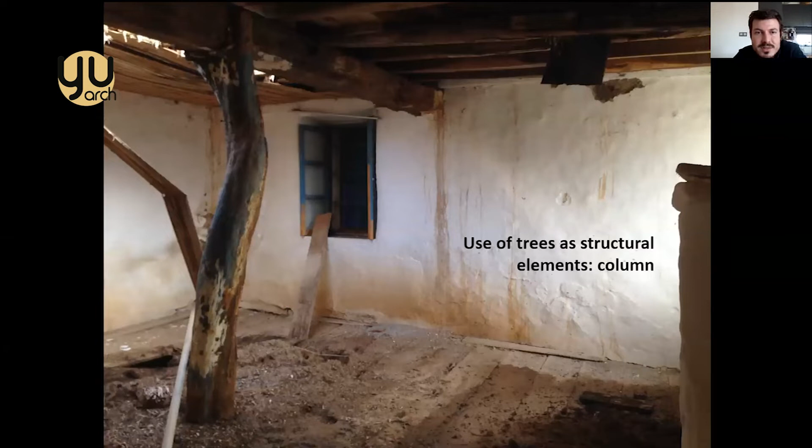Another interesting material, the use of trees as structural elements. They cut the tree and they just put it there as a column. They don't change its shape. It's structurally not very stable, but it's really interesting to use such a natural element directly. For example, in this house, you can see it.

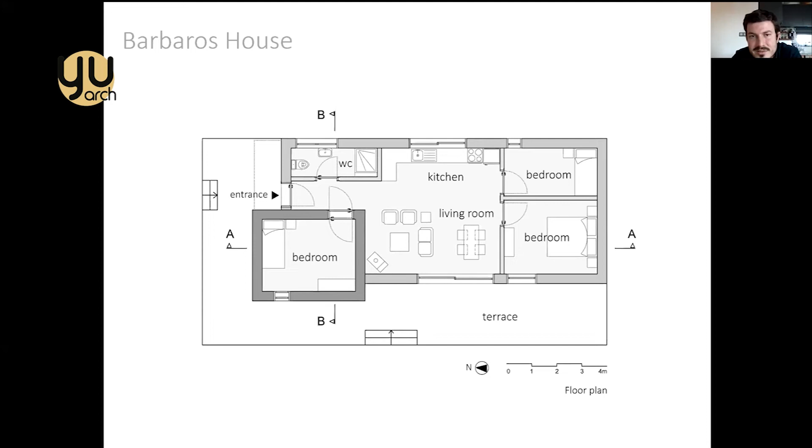So this is where I'm talking now. This is the kitchen and the living room together.

It's a really small house. It's about 80 square meters. And this is the part of the living room.

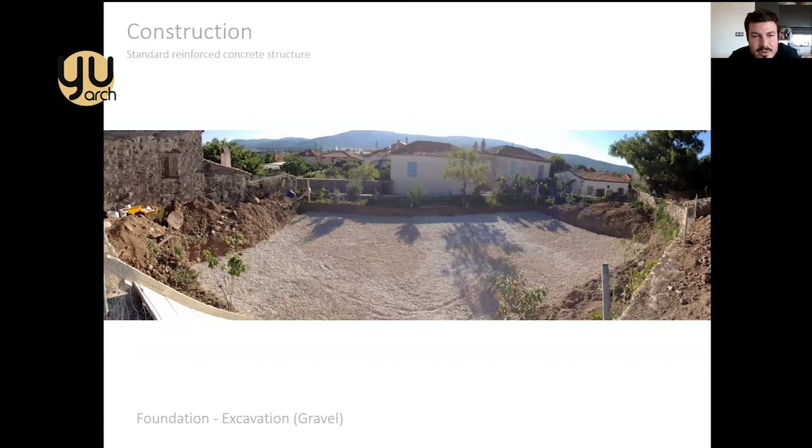And I'm going to show you the construction, starting from the excavation and the reinforced concrete foundations, etc. Just let me skip these slides quickly. This is the photo from the beginning, and then we poured the lean concrete and then made the water insulation.

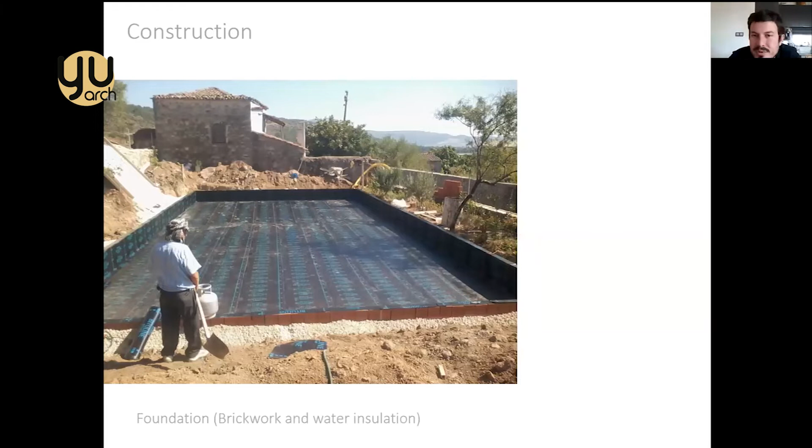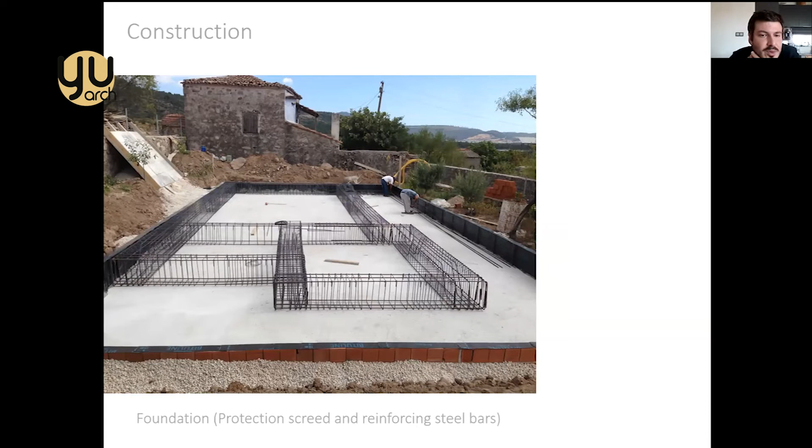And for the foundation, on the top of the water insulation, we poured the protection screed and put the reinforcing steel bars, which is almost the same shape as the whole building, actually. And then the continuous footing formwork was done, and then the concrete foundation walls were finished.

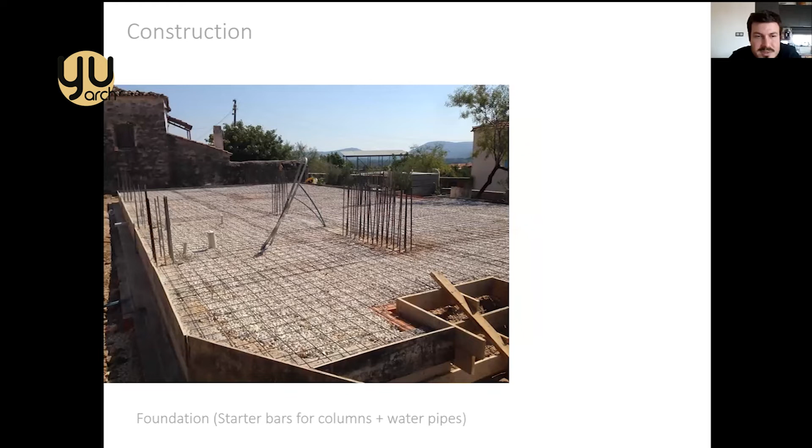After that, you can see the starter bars for columns and the water pipes coming out of the foundation. So this is the plywood formwork for the concrete part of the building, the bedroom part.

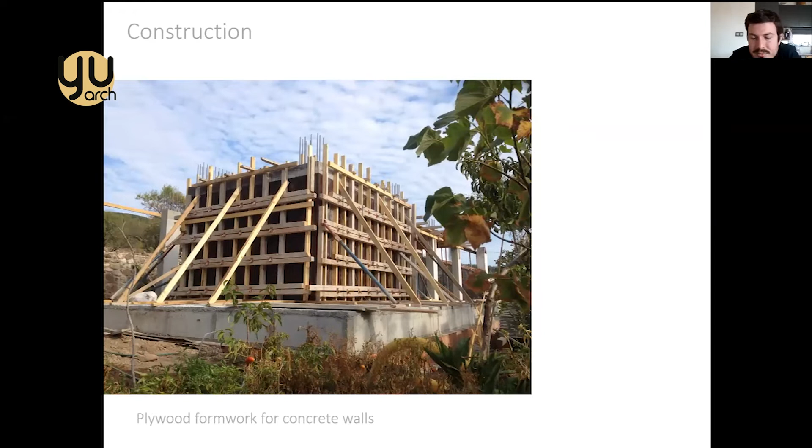And after finishing the concrete formwork, the acoustic and thermal insulation materials were put next to the concrete, and then a second layer of brick walls was completed in order to provide a really good noise control, let's say, to attenuate sound from outside. You have to use heavy walls and a good layering where you have two heavy layers

and a gap plus porous insulating material like rock wool. You can see here we use rock wool. So this is a good solution.

And then I have two windows and two doors next to each other to be protected from the sound transmission, which will be possible through the windows. So I had to use two windows and two doors.

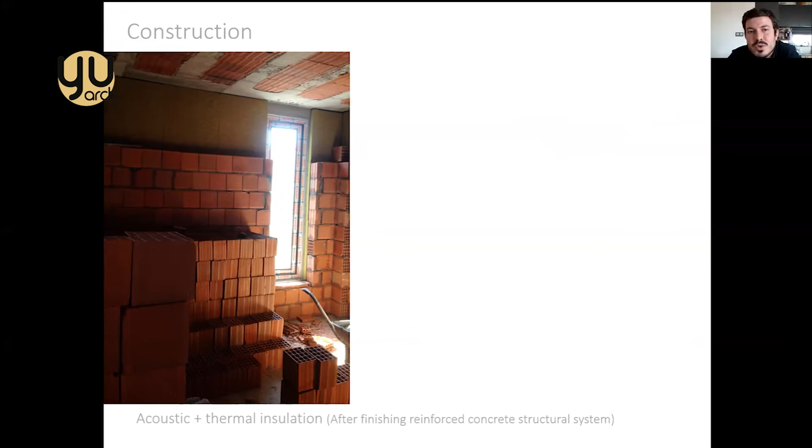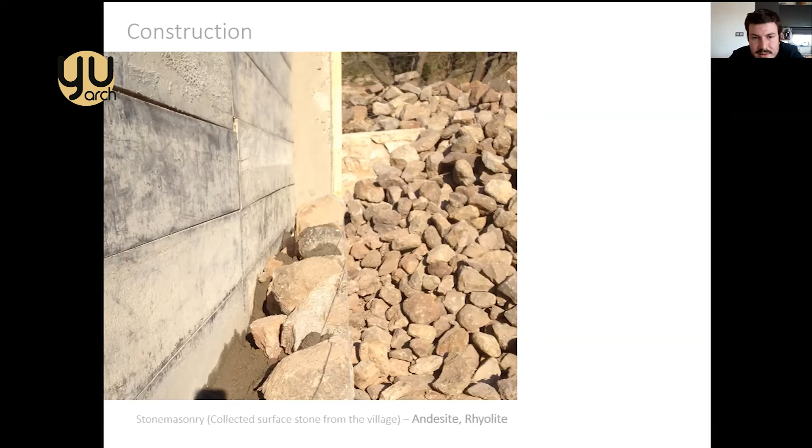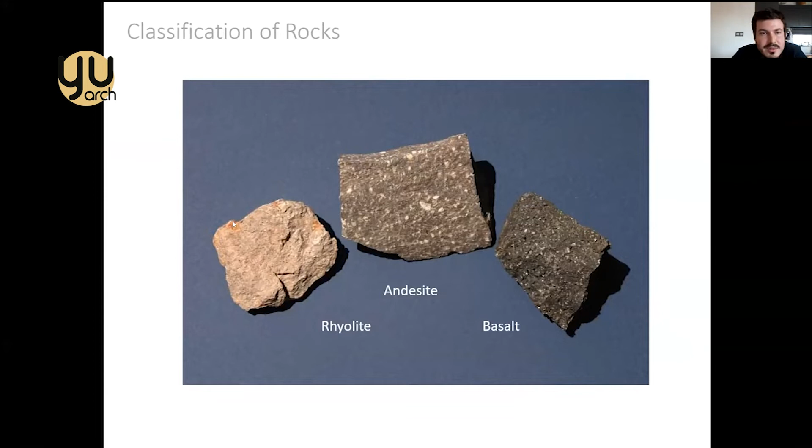So these are the three main stones which are collected from the surroundings with some workers: rhyolite, andesite, and basalt. Basalt is mainly more dark in color, but rhyolite is pinkish, and andesite can be black to brown colored, right? So, as I said, these are extrusive magmatic stones, basalt, andesite, and rhyolite.

But there are lots of different types of rocks which are intrusive magmatic, which means the magma tries to come out to the surface but cannot come right on the surface, and it stays a little bit in the ground. So these kinds of rock formations are called intrusive magmatic, and the ones that can come out from the ground are called extrusive magmatic rocks.

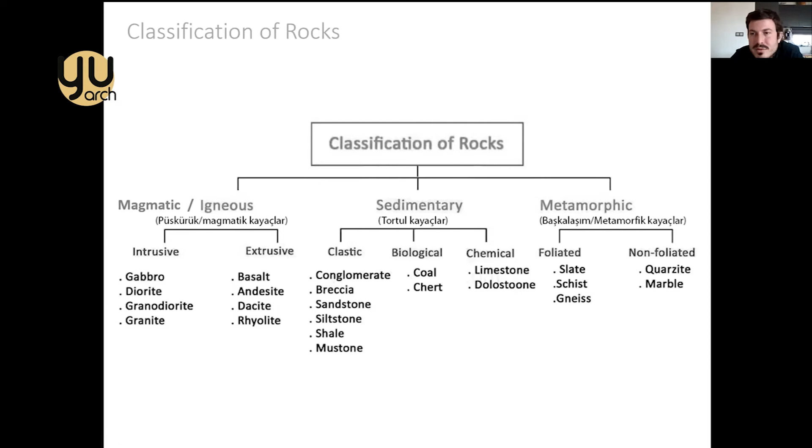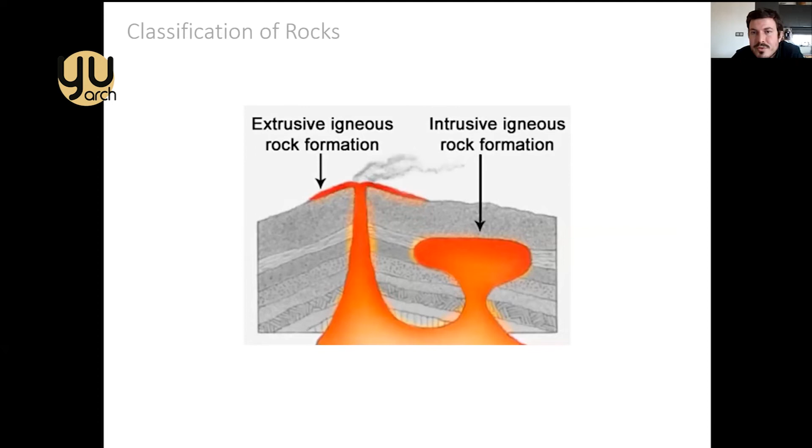And there are also sedimentary rocks and metamorphic rocks, which are used very often in architecture as elements like wall elements or floors or any kind of architectural elements. You can use them in your kitchens, kitchen tops, right? And this is a figure that shows the extrusive and intrusive magmatic rock formations.

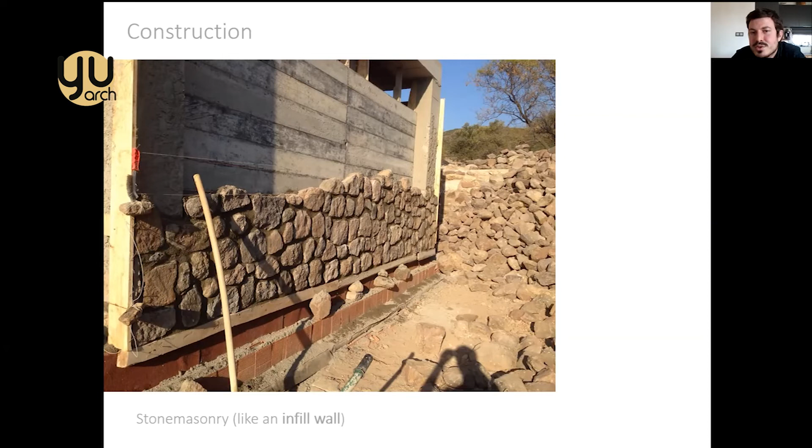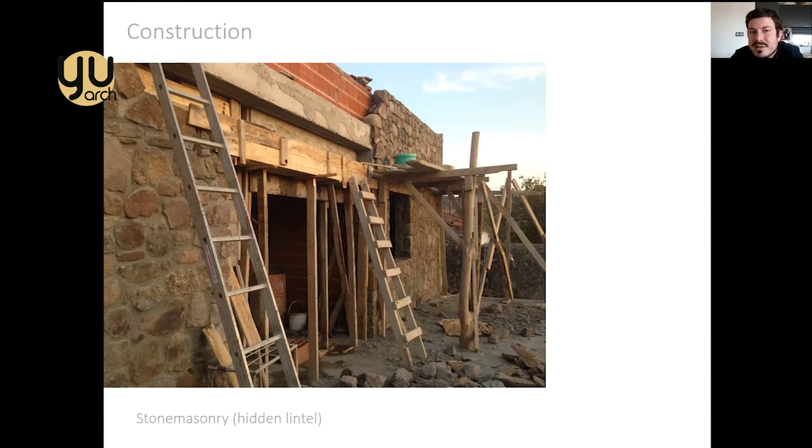So you can see here the hidden lintel. Usually you see the lintel on the top of the window in vernacular architecture. Mostly they use wood or the stone itself as one complete lintel. But I decided, for visual purposes, to cover the lintel with the same stone, so that we don't see any different material on the facades.

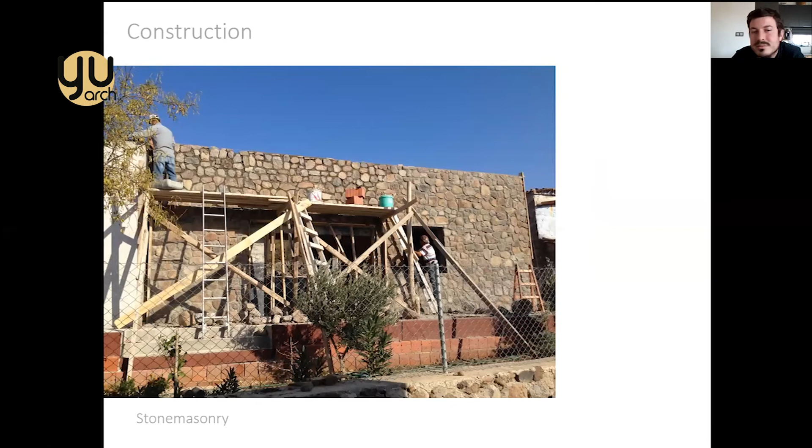So at the end, on the facade, the only thing that you see is the same type of stone and no other lintel element or no other element at all. And this is the final photo after completing the building, the stone part plus the bedroom, which is made of reinforced concrete.

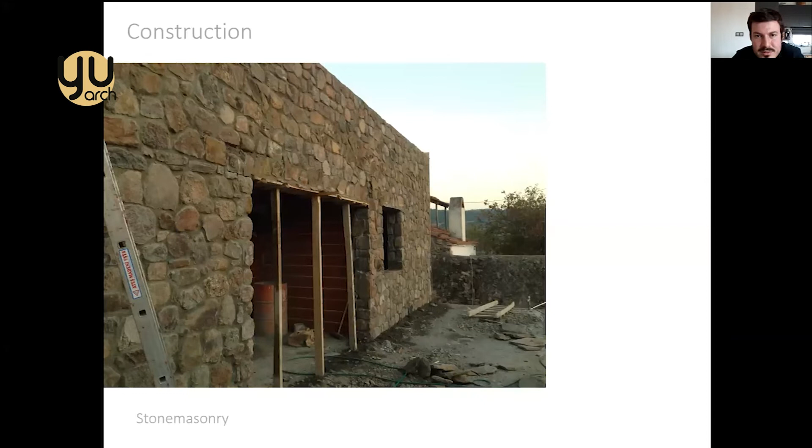And the trees that I planted, you can see they are now covering all the facade, and I cannot take any photos anymore. So I'm glad that I took them before. So again, some photos from the construction. Let me skip these. This is again the final photo of the house. This is the northern part.

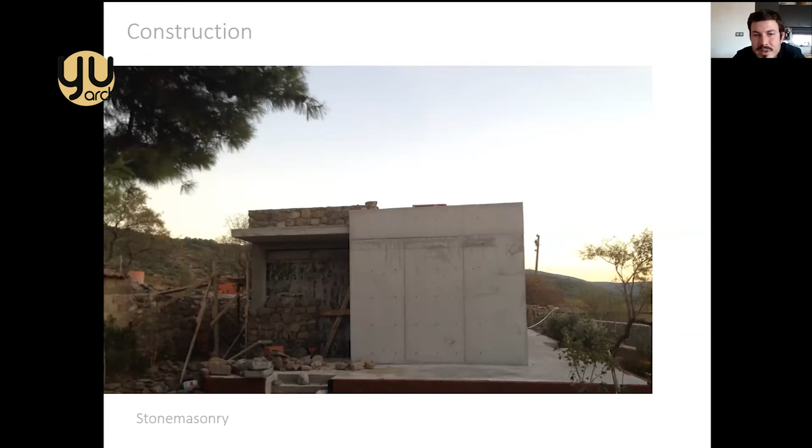On the north facade, there are no openings or windows because the prevailing wind coming from the north is really cold in winters here. So I wanted to make sure that I protected the house from the Poyraz coming especially from the north, but also from the east. And this is my dog, one of my dogs, Çakır.

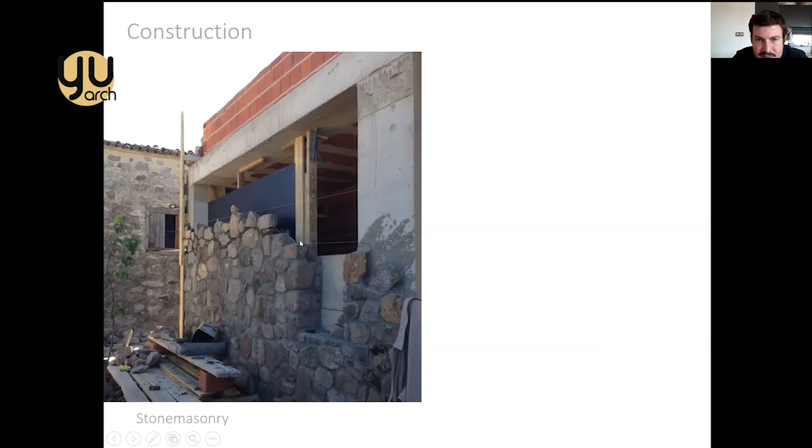So again, on the facade which faces the sun in the mornings, the openings of the windows were left really thin, and I used some ribbon windows there. As you can see, in front of the column, the stones are very thin, like 10 centimeters. But the other part, you can see here, it's about 30 centimeters, right? So you can understand the section of the wall. Again, this is the final facade photograph.